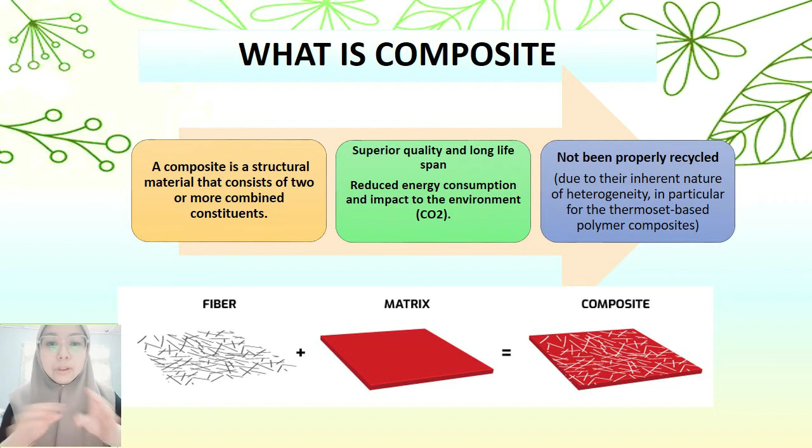So first of all, what is a composite? A composite is a structural material that consists of two or more combined constituents, or in simple words, it is a combination of fiber and matrix, and it becomes a composite. Composites offer superior quality and long lifespan, and besides, they help reduce energy consumption and impact to the environment. However, composites are not being properly recycled.

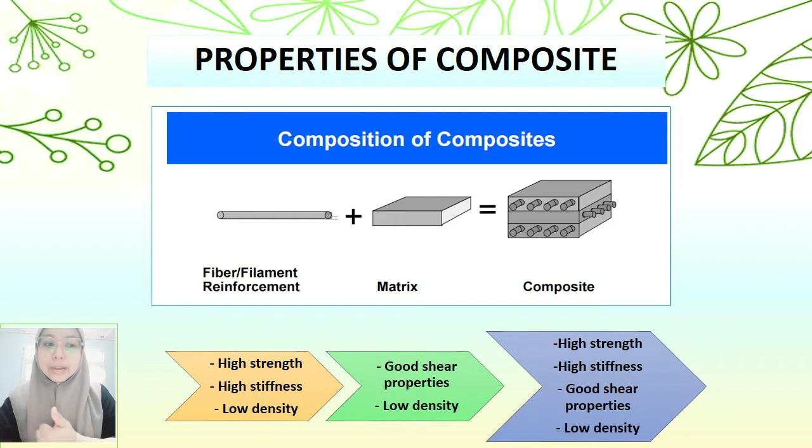As I told before, the properties of composites offer superior quality. The fiber has high strength, high stiffness and low density, combined with the matrix which has good shear properties and low density, and together they become a good composite with high strength, high stiffness, good shear properties and low density.

Next is the types or categories of composites. It consists of three main categories: ceramic matrix composites, organic matrix composites, and metal matrix composites. Organic matrix composites divide into two main categories, PMC and CMC, and then PMC further divides into thermoplastic matrix composite and thermoset matrix composite.

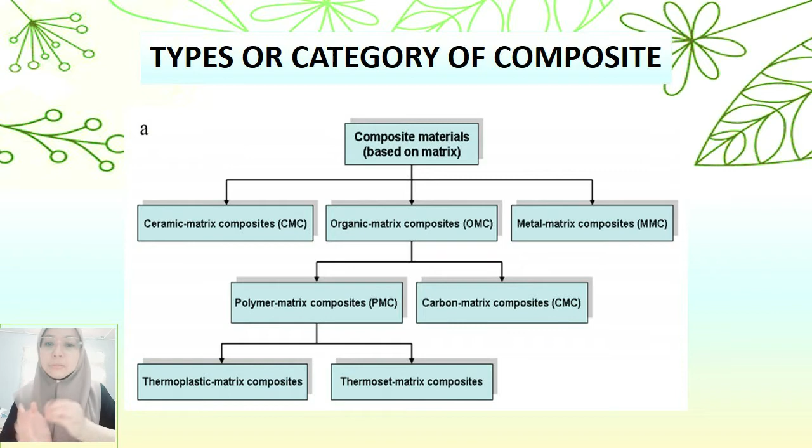Composite is widely used, and a few examples of applications of composites are in automotive, military, aircraft, and also sport kits.

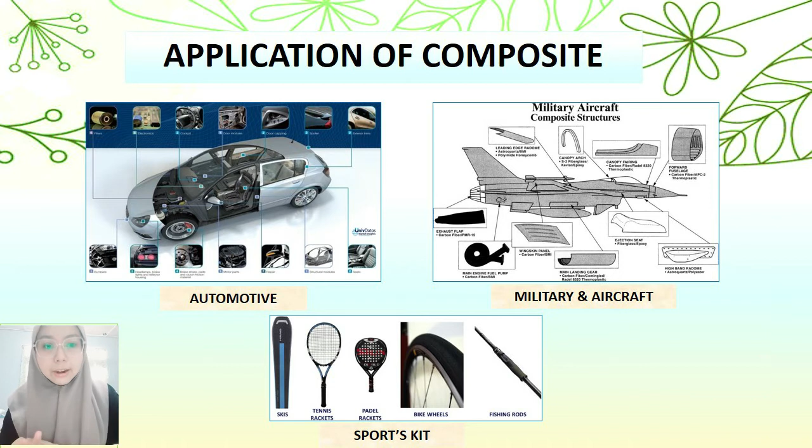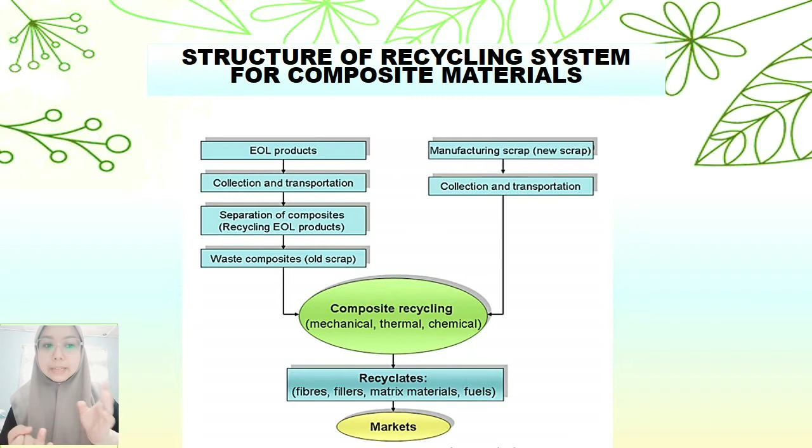Next we go to the structure of the recycling system for composite materials. It starts from EOL products, which is end of life products, and new scrap, and then it goes through the chain to composite recycling, which divides into three main categories: mechanical, thermal and chemical. For the topic of recycling composites, we will focus on three types: thermoplastic matrix composites, thermoset matrix composites, and metal matrix composites.

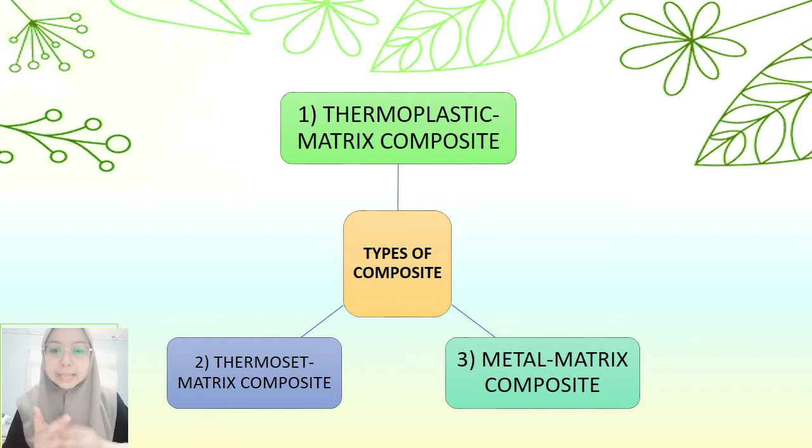First of all, for thermoplastic matrix composites, it divides into three methods of recycling: remelting and remolding, chemical recycling, and thermal recycling. However, there is not much study on chemical and thermal, so we are focusing on remelting and remolding. For this process, there is no separation of matrix from the fiber, but they undergo a regrinding process, for example compression molding or extrusion, and the product will be pellets.

The video will show the animation process of thermoplastic recycling.

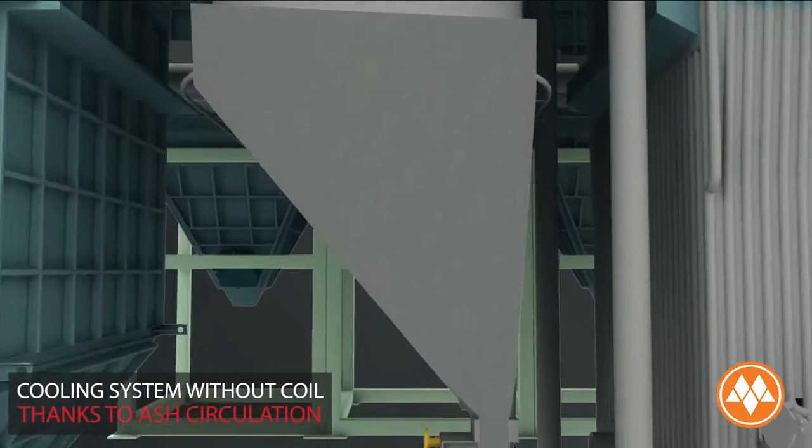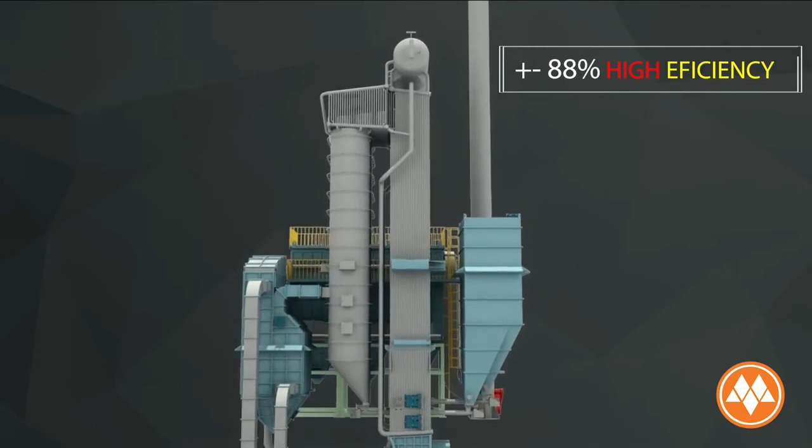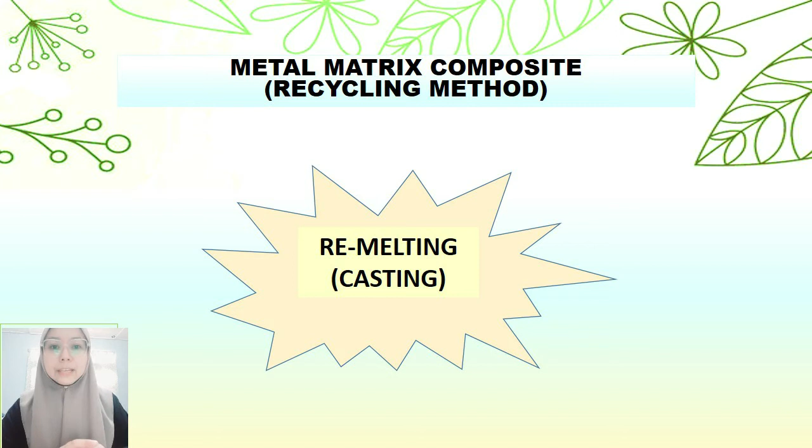The last one is metal matrix composites, and the most common method is remelting or casting. For this process, a few types of furnace are used, but the most common one is the induction furnace. Here is the simple process of induction furnace remelting of metal.

So those are the three types of composites that are normally recycled. Although there are pros and cons, we still need to recycle as much as we can to save our environment. The choice is in our hands.